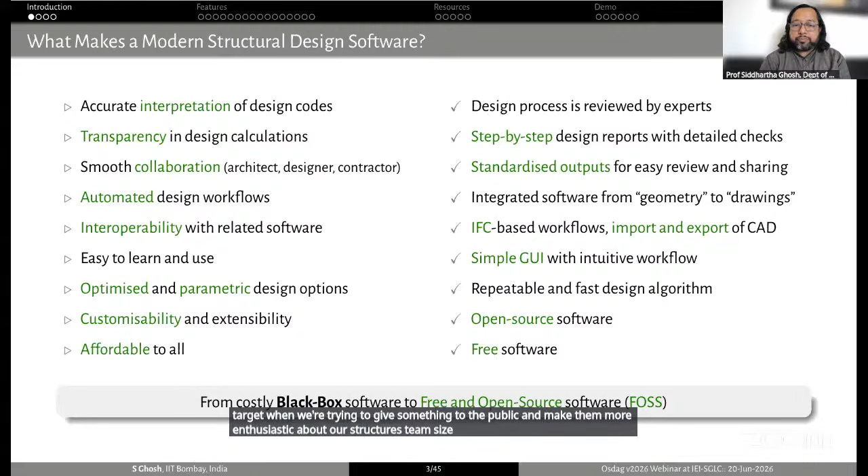Currently what we have are black box software, because you don't know what's happening inside. To develop faith and trust in this software, you need to keep using it, do cross checks, for years to develop that faith. Still, sometimes you may say, I don't really know how this mass is calculated, I don't really know how torsion rigidity is calculated. That's where free and open source, FOSS software, comes in and says, I can tell you exactly what it does, and you can make sure for yourself that it does it the way you want. So absolute transparency is something you can achieve through that.

Now coming to OSDAG, what does OSDAG do? It's a very simple software, that's why sometimes we call it a tool, not even a software. It does design and detailing of steel structures as per IS 800 2007, because that's the most recent code we have. Once it's updated, we'll go for an updated version. Note that it follows IS 800 primarily at its core, and the goal is to aid teaching and learning in a classroom environment for structural steel design, but also for practicing professionals. We wanted to provide an affordable and transparent alternative to typical software you may be familiar with.

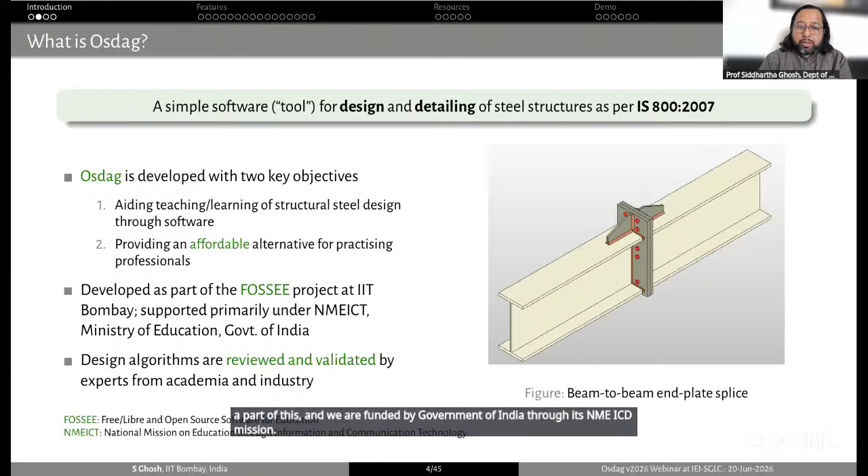Now, what are the motivations? I touched upon this earlier, but let's go through it again. What I find, from personal experience but corroborated by many experts in this domain, is that many structural engineers are not really confident in steel design compared to their expertise with RC design. It's a very big difference. In most places, only a few people know how to do steel design, most others do not. It's an unfortunate situation, but this is one big motivation for creating OSDAG.

Also, there is a lack of standardized and accessible tools for teaching and practice. When we say standardize, we are looking at Indian standard, but also how you practice it. And accessible, so affordability becomes a constraint. Commercial software are costly. For example, software that focuses on connection design and provides customized solutions for steel connection design is really, really costly. What happened in India, if we look back 20, 30 years, there is still a lot of software piracy.

So we used to have pirated software on our computers, which is definitely not an ethical thing to do, right? So we also wanted to move away from that. I mean, with our technological know-how, why should we use pirated software?

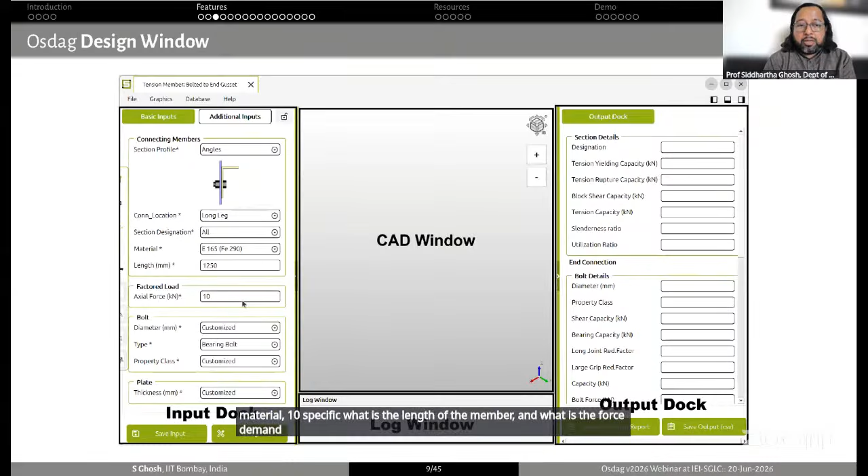These are all drop-downs that one can use. Then you specify material, then you specify what is the length of the member, and what is the force demand. I'll come to each detail later on. You can see the options, different sections you can use to design the tension member, how you connect it, the material, the forces.

Once you go to the bolt and diameter, you don't specify the bolt diameter directly. Either you select all, meaning all bolt diameters typically available in the market, or you can say my supplier gives me only this bolt, so I'll use these diameters. Once you say customize bolt diameters, it gives you an option to select using this pop-up. So here you are selecting 8mm and 10mm bolts.

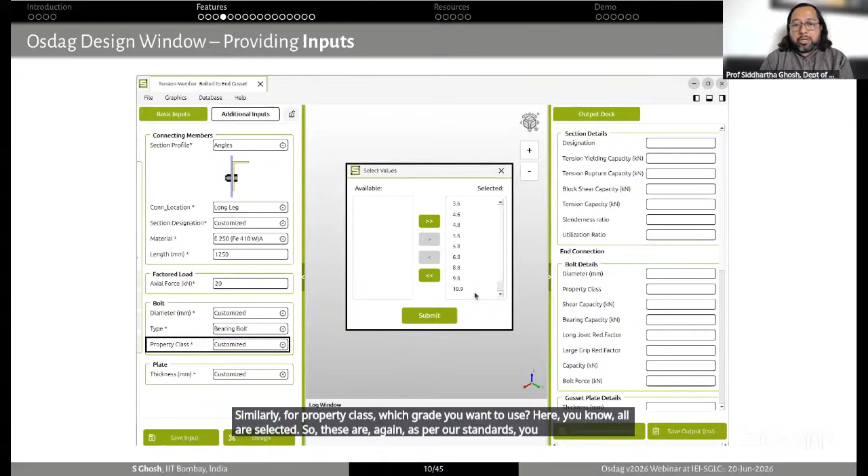Similarly, what kind of bolt behavior you are expecting. You can use bearing bolts, which are the typical black bolts, or you can also use friction grip bolts, HSFG bolts. That selection option is there. Similarly, for property class, which grade you want to use. Here all are selected, as per our standards. You will see the whole standard has been coded into the software.

So you have all of these on the tip of your mouse click. And the plate, which is basically the gusset plate, what kind of thickness you're going to use. Again, you can give individual selections, select them all, or it's up to you. Here you are selecting some discrete values like 14mm, 22 and 28. It will do the design with that.

Once you have fed every information, you can see that there are these asterisk marks. Wherever there is an asterisk, that means it's mandatory information that you have to select. Once you do that, you need to click on this design button, and then it does the design. You can also separately save the input for future use.

There is one more thing that I wanted to show you. So far we are talking about basic inputs, but there is this tab for additional inputs. If you are an experienced designer, you can come to this, but for learning, you don't need to come to this. For an experienced designer, yes, this is very important. Let's look at what it is.

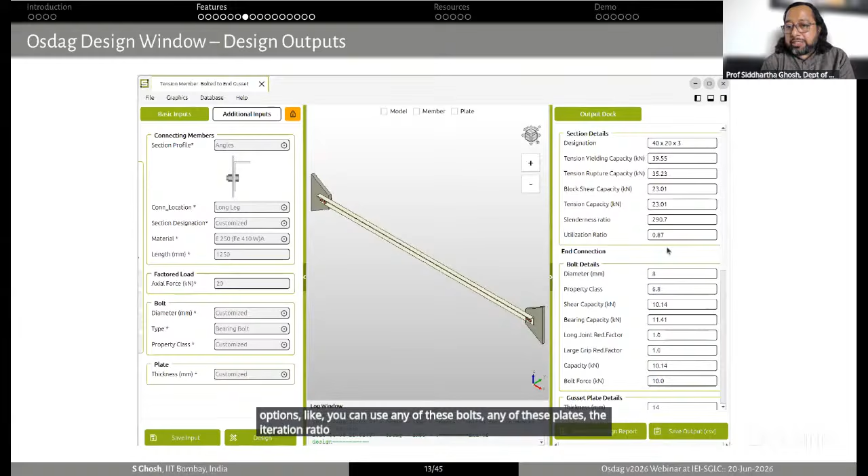Absolutely every information you can find over here. There is a scroll bar, you can scroll down, you can find information on the section, what are the capacities, what are the demand, what is the utilization ratio. Many times you look at that. Since you gave many options, like you can use any of these bolts, any of these plates, the utilization ratio is pretty high. You can achieve good design. Similarly, there is information on the bolt, the gusset plate, and so on.

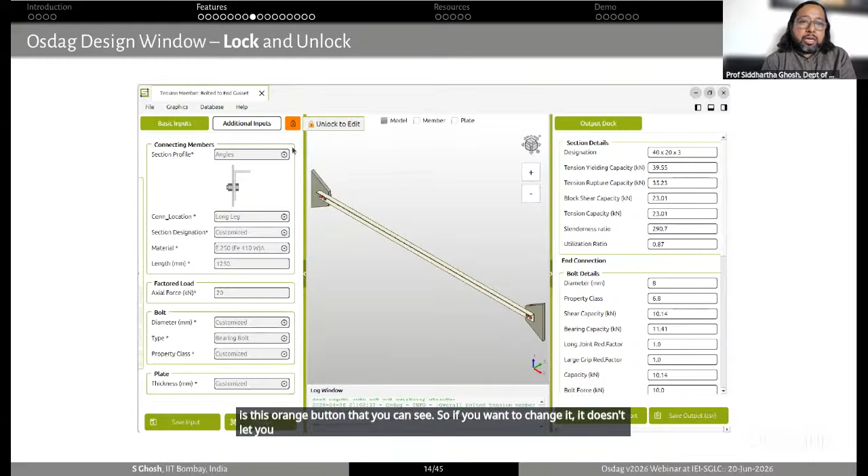Here you can see if you don't like the design and want to change something, there is this orange button. If you want to change it, it doesn't let you unless you intentionally want to unlock. Once you unlock, then you can change the design. Again, you can generate a design report - you can see the button here - and also save output in a spreadsheet readable CSV format.

If you look at the CAD part, as you put your mouse on it, it highlights wherever your mouse is, highlights that component of design and gives you the details. So it says it's a 6.8 grade bolt, diameter is 8 millimeter, and the number of bolts in this connection is 2. Here you can also see the details of spacing between bolts, bolt capacity, all the information.

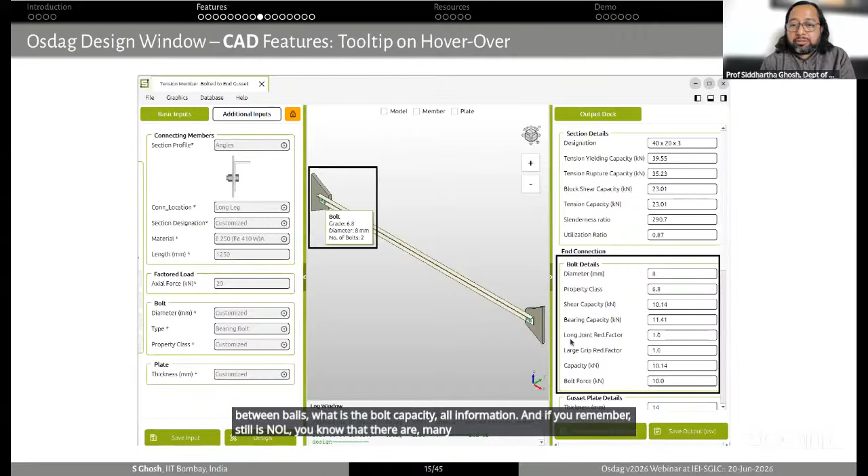If you remember steel design well, you know there are many calculations, including long joint reduction factor, large grip reduction factor, etc. This shows that it can take care of all of those, and it has taken care of everything.

Of course, if you want to see whatever you have designed in greater detail, you can close the input and output dock and fill the whole window with the CAD window. Here the whole model is selected, but you can also select the plate, the member and the connector separately - it will show it that way.

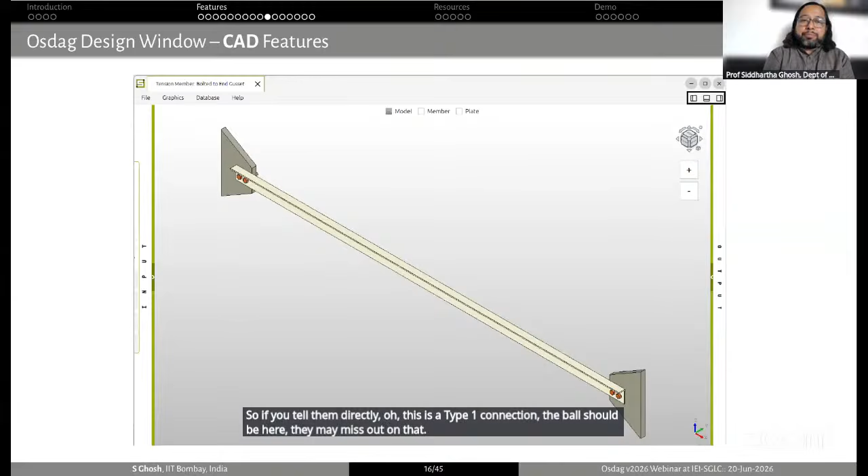Why we put this much effort into the CAD is that many times we see young professionals are not so familiar with being able to visualize the thing they are designing. If you tell them directly, this is a type 1 connection, the bolt should be here, they may miss out on that. But once they design something, they keep seeing these things - what is a type 1 connection, what is a type 2 eccentric connection - these things become very easy for them to understand. That's what we try to achieve with this.

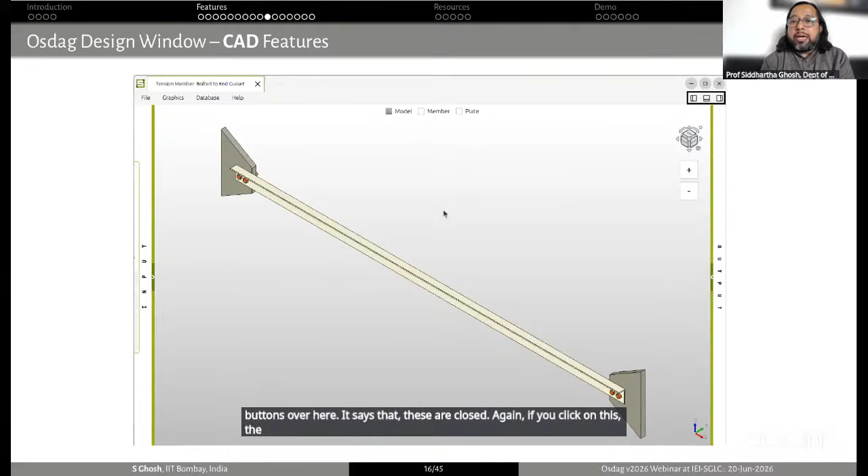So you see that the input dock and output dock have been closed. This can be selected using these buttons over here. It says that these are closed. Again, if you click on the small arrow that you see there, this part will get darker and you can see the whole thing.

There will be a demo, of course, and you can see much better what it does. We'll also see more about the cube, the zoom controls I talked about. And as I said, you can see it separately.

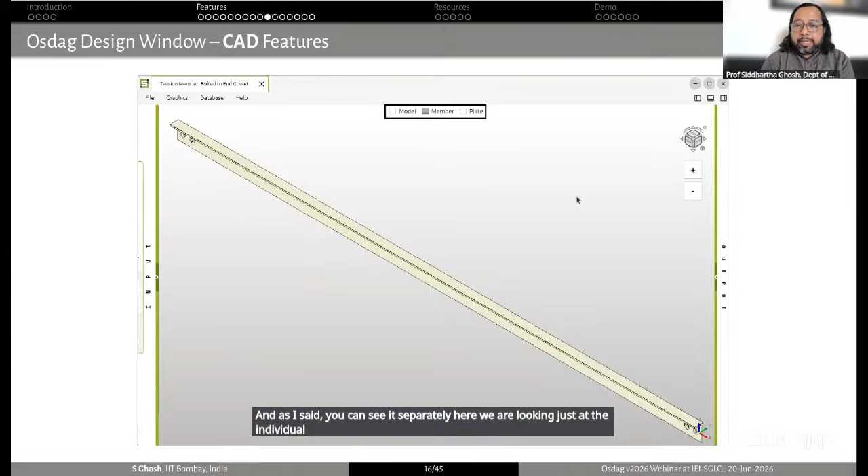Here we are looking just at the individual member, the angle section. This is a scale model. So if you have a cutting machine and want to drill holes for the bolts, you can give it to your fabricator, and they should be able to very accurately put the holes of proper dimension in the perfect location.

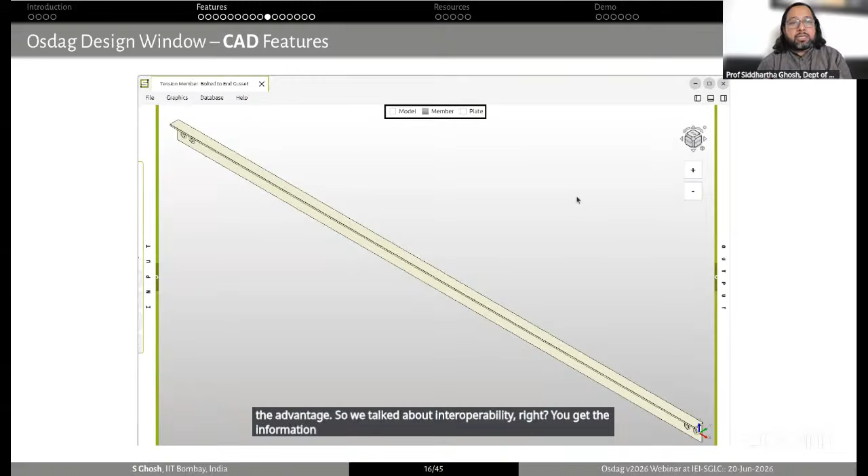That's the advantage - we talked about interoperability, right? You get the information from the structural design and give it to the fabricator, and they can use it. That's what we are trying to do over here.

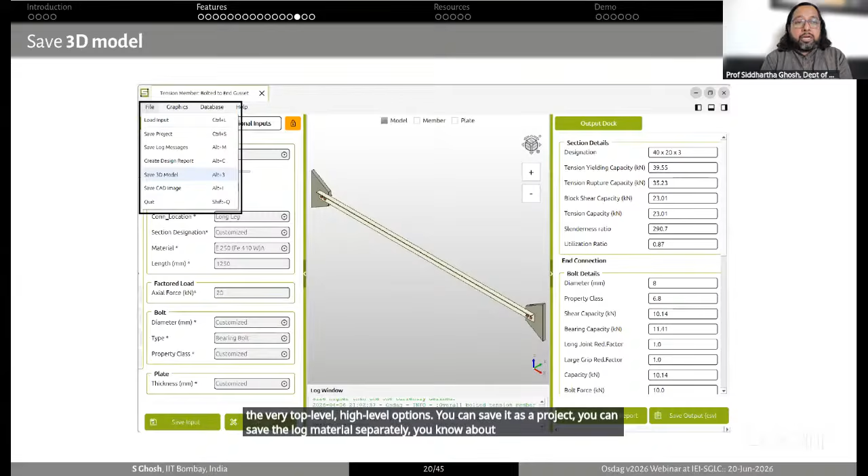There are options to save the project. If you go to file, these are the top level options. You can save it as a project, save the log message separately, or create a design report. But what I want to draw your attention to is how to save the 3D model.

I don't know what you are using. Maybe you are using SolidWorks, maybe you are using FreeCAD, which is another free and open source software. All these CAD apps or CAD software can open these files.

I'd particularly draw your attention to IFC, because IFC, Industry Foundation Classes, is the standard for any BIM, building information modeling software, and it should be the key for interoperability between software, so information can go from one software to another without any hassle at all.

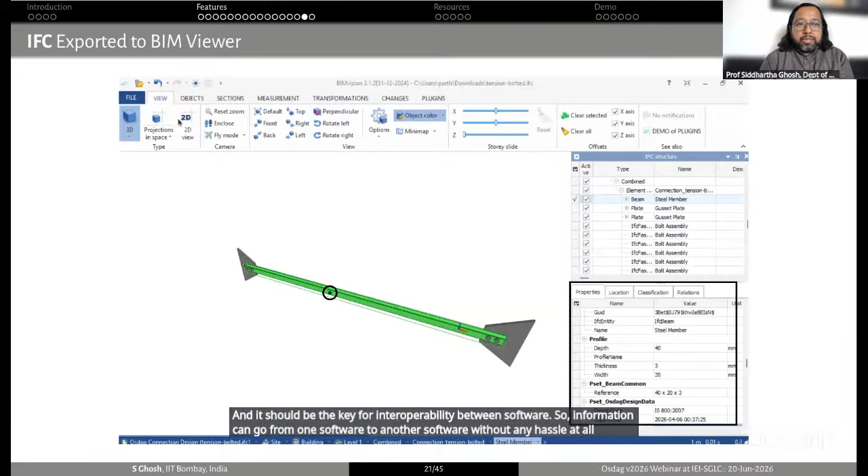Here we are showing you that we got that IFC file, and we are looking at the IFC file using a BIM viewer software. Once you select, you can see the green one is the selected one. It shows to the right side in this box, and it shows all the necessary information for this element.

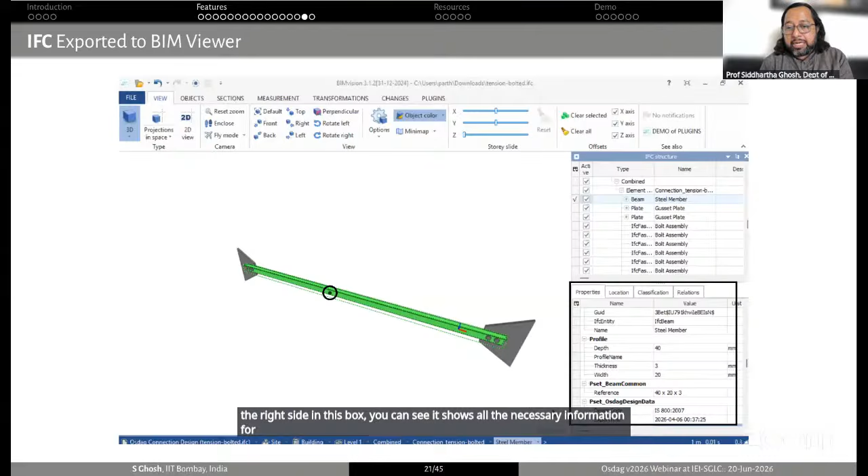It even says what code it is using and all the dimensions. Every information is given there, because that's what IFC does. It shows the metadata very easily, and one can check the design as well.

If you are familiar with this drafting software, from the 3D model you can also create 2D drawings, structural good-for-construction drawings that can also be created. So that's how we ensure it goes very easily from the structural designer to someone who's going to check it using the design report, or someone who's going to fabricate it, and finally it gets constructed.

Fossee is free and open source software, mostly for education purposes. But as you can see, OSDAG can be used both for education and actual engineering practice.

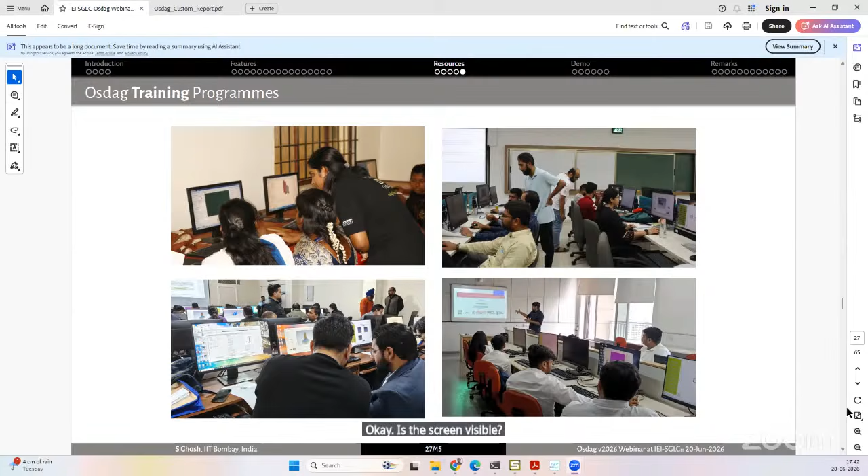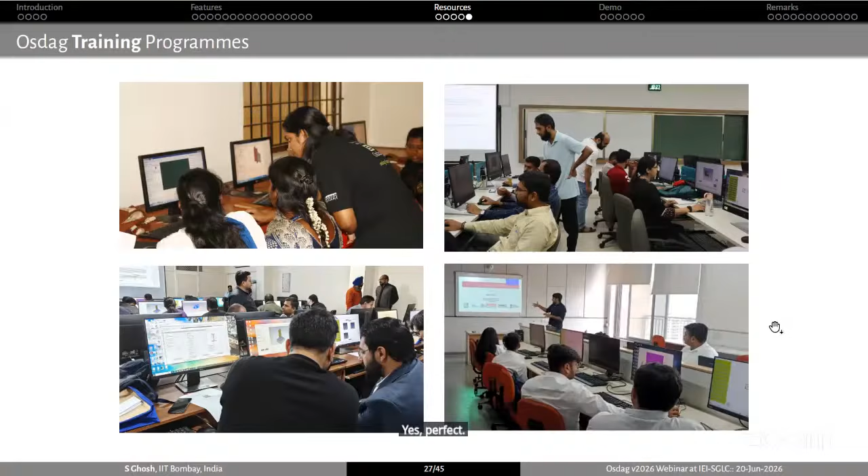Okay, hi, thank you everyone for joining. I'll give a brief demo on OSDAG.

The first demonstration problem is on cleat angle connection. We've tried to frame these demonstration problems like a textbook question, showing how we can integrate OSDAG. The question says: design a cleat angle connection between MB400 and MB250 beams for a factored design shear force of 40 kilonewtons. The bearing bolts available are of sizes 12, 16 and 20mm, and of grades 4.6, 5.6, 8.8 and 10.9. The grade of steel the question asks us to take is Fe410 with Fy 250, and we can assume any data if necessary.

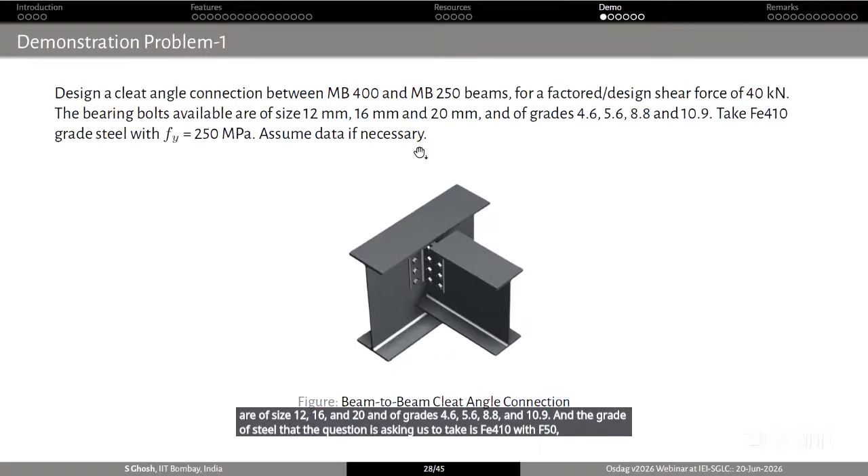Now if I go to OSDAG, this is the OSDAG homepage, and these are the modules that we have. Since the question has asked us to design a cleat angle connection, we'll go to connection, where we have many different types of connections, then to shear connection, and there we'll find the cleat angle connection module.

These are the inputs required for the cleat angle connection module. Now we'll go back to the question to see what the inputs are. The module we've selected is connection, shear connection, cleat angle connection, where the connection is between two beams, MB400 and MB250.

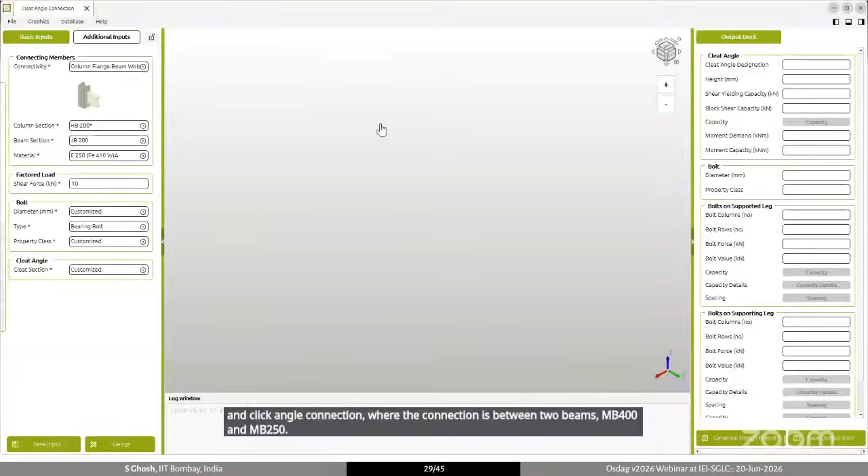Here you have a few options: you can connect column flange and beam web, column web and beam web, or beam to beam connection. Since the question asks for a connection between beam and beam, we'll select beam to beam, and you'll see a representative image of this connection here.

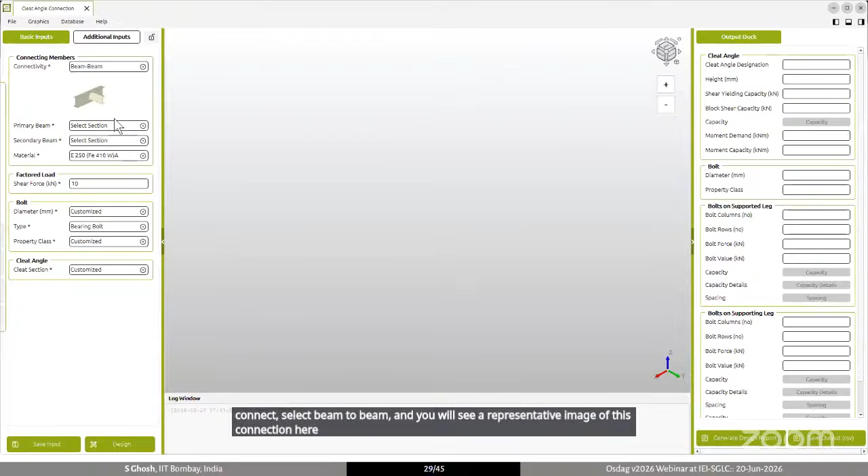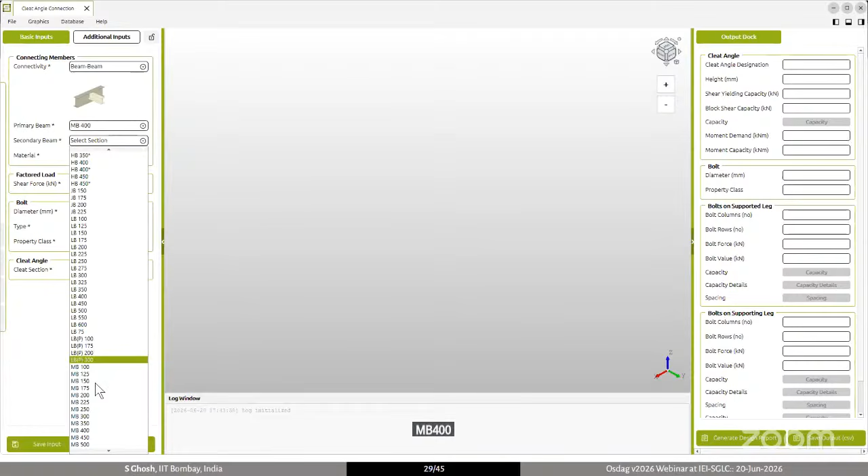The question says the primary beam is MB400, secondary beam is MB250, and the material is E250 Fe410WA. So we select the beam from here: MB400 and MB250. This list of beams covers a lot of beams as per IS 808 and commercially available NPB, UB, UC sections. This is a comprehensive list.

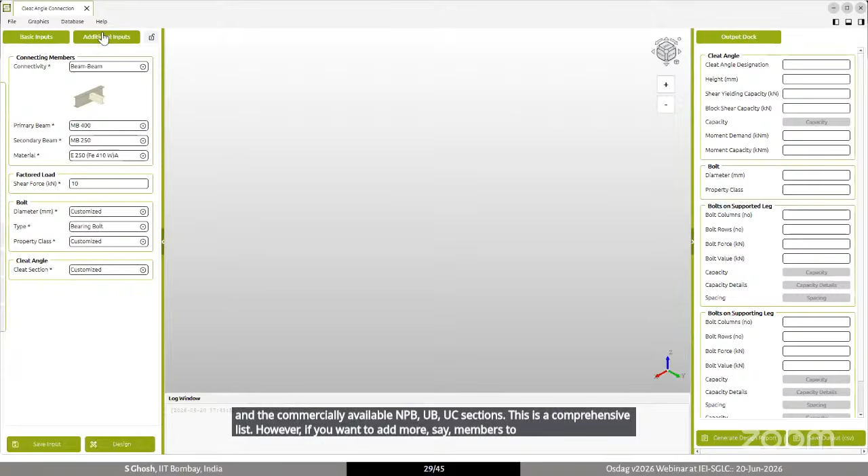However, if you want to add more members to this list, there's always an option in additional inputs where you can download the sample file, put in the values, import the file again, and add your members to the database as well.

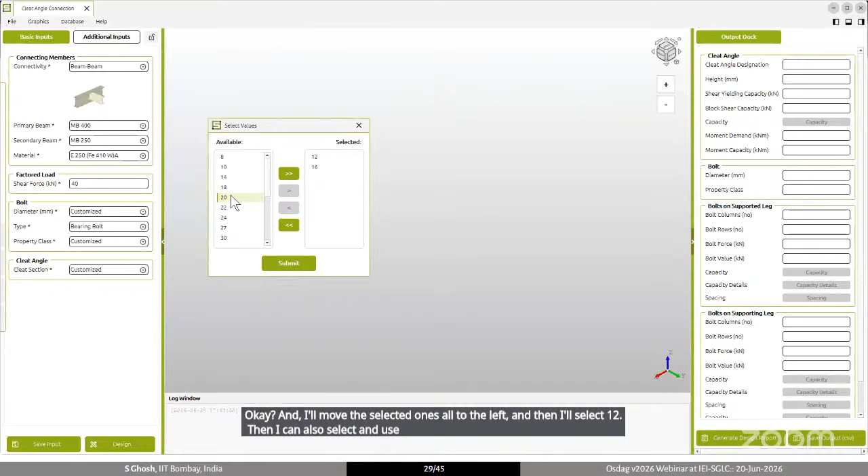Coming back to the question, shear force is 40 kilonewtons, and bolt diameters available are 12, 16, and 20mm. I'll input a shear force of 40 kilonewtons, and for diameter I'll go to customized, move the selected ones all to the left, then select 12, then use the arrow for 16, and double click 20, then press submit.

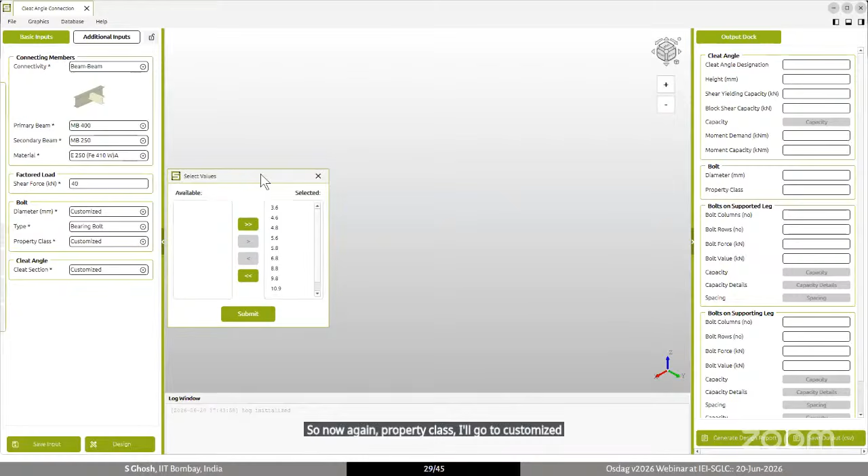The type of bolt is bearing bolts, and the property classes are 4.6, 5.6, 8.8, and 10.9. For property class I'll go to customized, move all of these here - 4.6, 5.6, 8.8, 10.9 - and press submit. We've already selected bearing bolts here, so we don't need to change that.

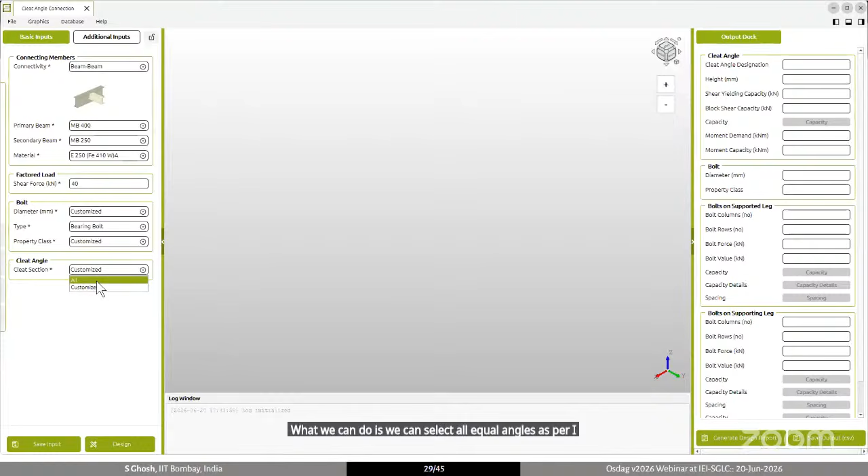Now, which angle are we going to use for this connection, the cleat angle? The question doesn't specify that, so what we can do is select all equal angles as per IS 808. I'll just go for all. So here I've given all of my basic inputs, and now I'll just press design.

Now the design is done, as you can see. Here you see the CAD window, the output dock which got populated with values after the design is complete, and the log window which says end of design.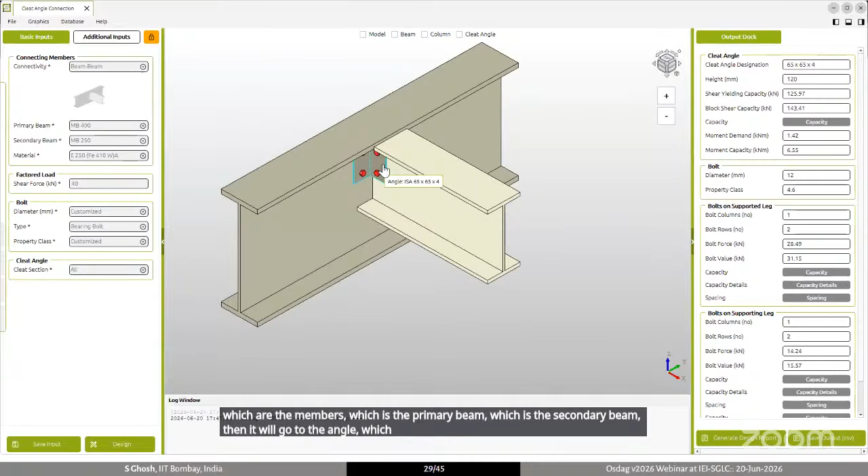Now coming to the CAD window, we can hover over it and it will give us the labels, which are the members, the primary beam, the secondary beam, then the angle selected, and details of the bolts.

Now we can use the scroll wheel to zoom in and zoom out. We can also use these buttons to scroll in and scroll out. We can click and rotate, and we can press the scroll wheel to pan.

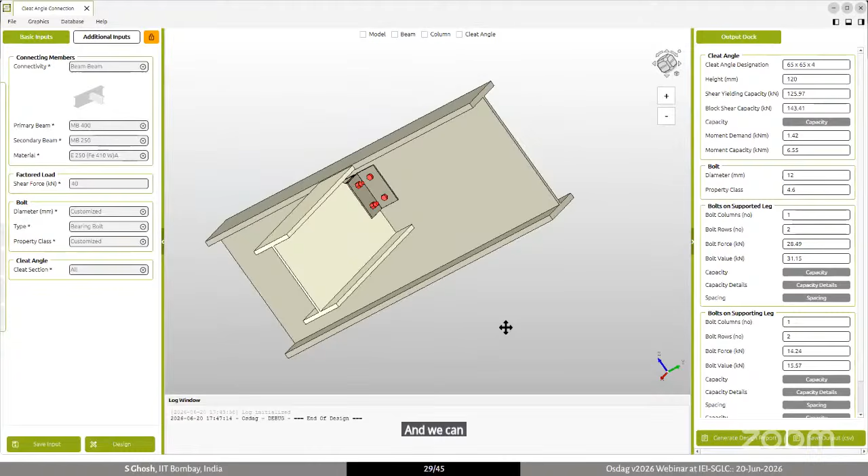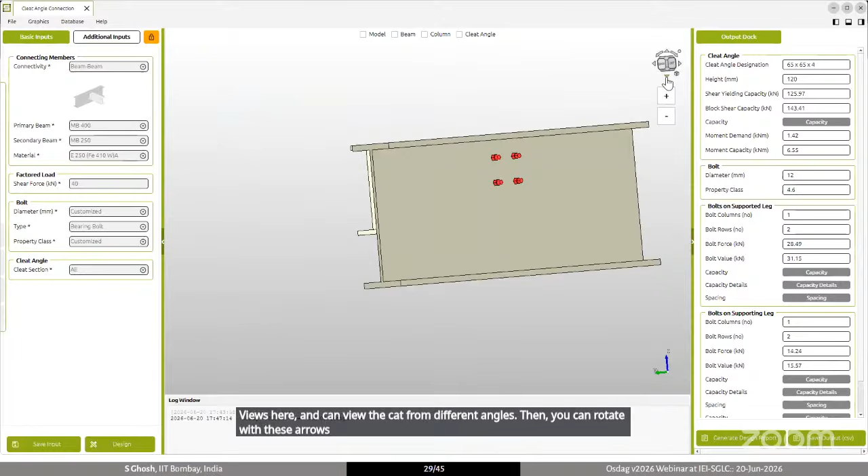Similar functions are available with the cube as well. The user can select different views here and view the CAD from different angles. Then you can rotate with these arrows, and this is how we can rotate as well.

So this is how the entire CAD functionality looks like. And as discussed in the features section, we can separate out different members and examine them and also export them for detailing. Now coming to the output dock.

In the output dock, we can see different outputs, which is the selected designation, and this is the most optimum designation as per the calculation. That's how the algorithm has been set.

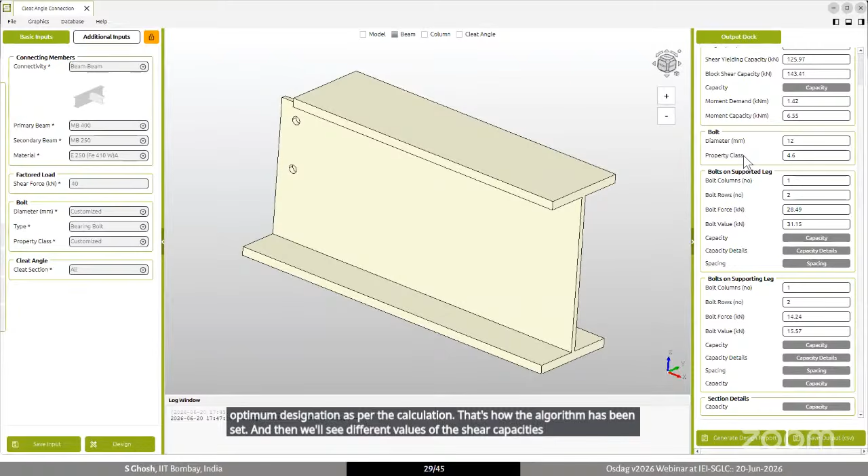And then we'll see different values of the shear capacities, the selected bolt and diameter. Like we gave OSDAG few options like select between 12, 16, and 20, and 4.6, 5.6, 8.8, and 10.8, and 10.9. So based on that, it went for an optimized design where it selected 12mm diameter with 4.6 grade.

Then it will also show spacing details, which is how the bolt has to be placed, and the capacities. It will show the capacities here.

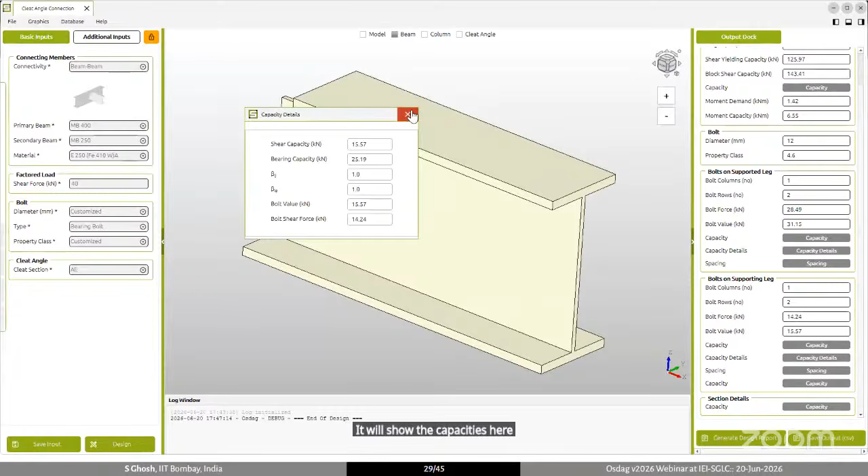And the most interesting part is it will show different failure modes as per the block shear patterns.

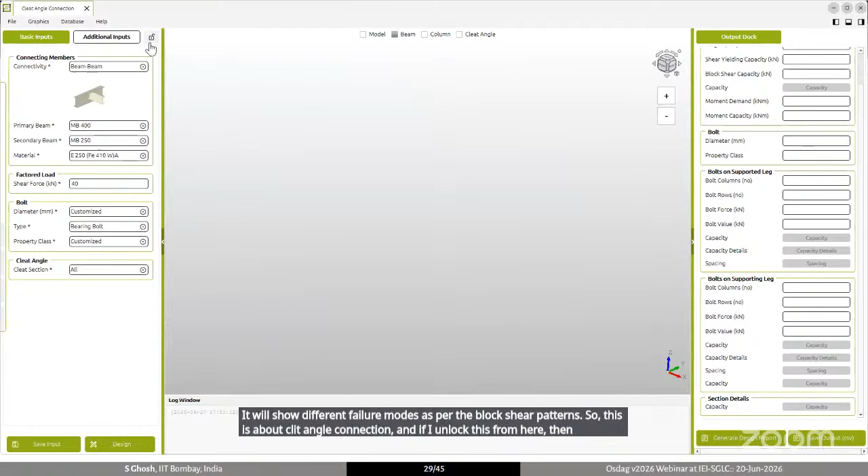So this is about cleat angle connection, and if I unlock this from here, then the outputs go away, the CAD goes away, and you can do a fresh design again.

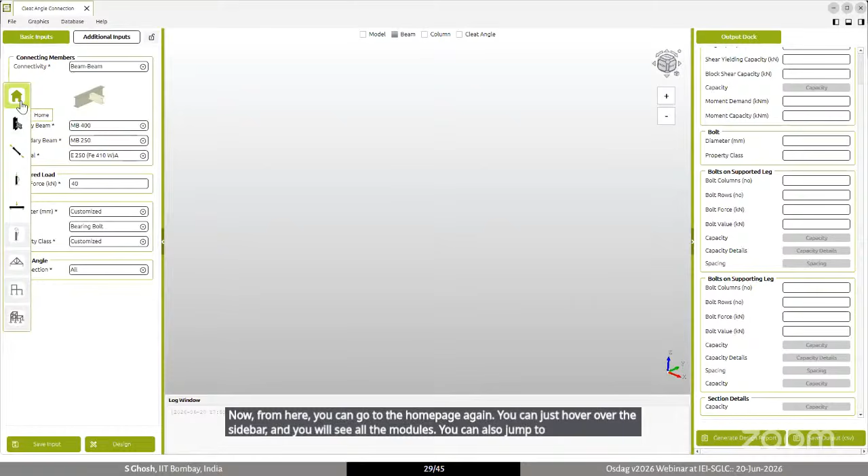Now from here, how you can go to the home page again is you can just hover over the sidebar and you will see all the modules. You can also jump to other modules from here. So we press home and see what's the next question.

Okay, so here the question is: design a bolted splice connection for ISLB 400 beam for a factored shear force of 75 kilonewton and a factored bending moment of 45 kilonewton meters. Design the most optimum connection using friction grip bolt having flange splice plates only on the outside. Take FE490 with FY350. Assume coefficient of friction as 0.48 and other data if necessary.

So now, when we go back to OSDAG, again it's a connection, but now we have a moment connection and it's a beam splice. So we went to connection, moment connection, beam splice, and cover plate bolted.

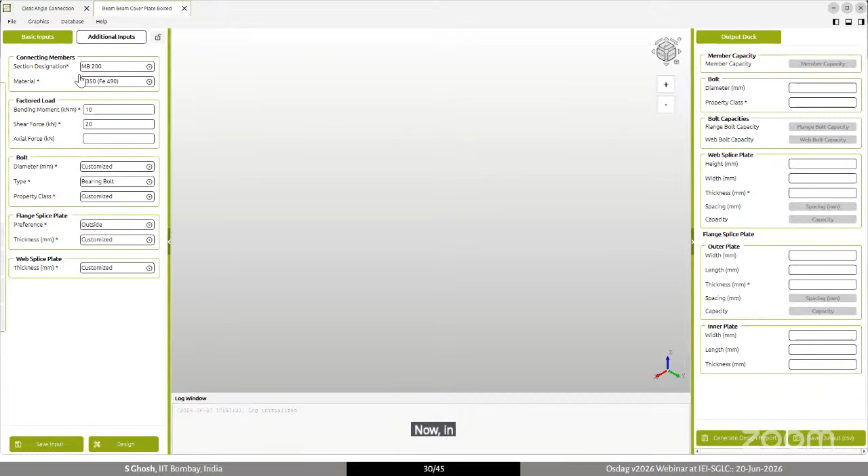Now in cover plate bolted, the question suggests that the designation of the beam is LB400, and the material is E350 FE490. So we go and select LB400 and we have the grade selected as E350 FE490.

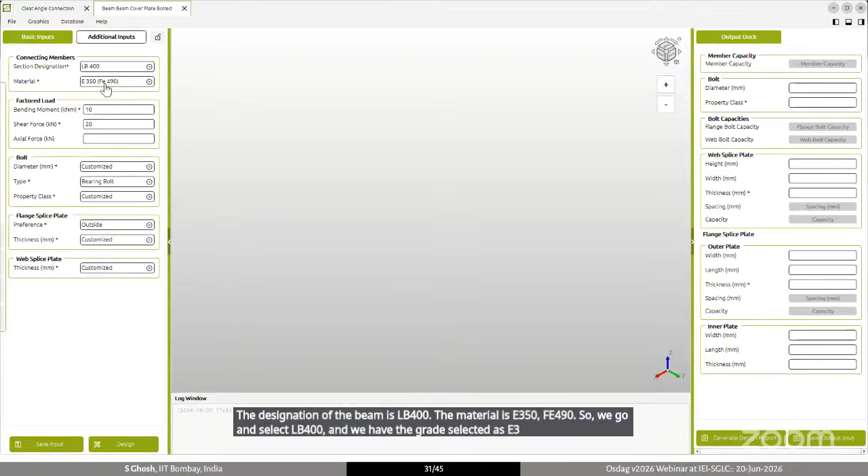Now the load demands are 75 kilonewton of shear force and 45 kilonewton meter of bending moment.

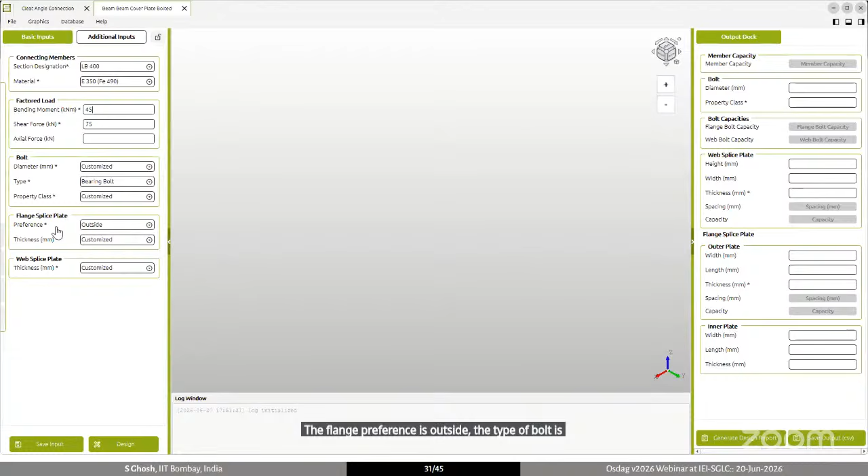The flange splice preference is outside. The type of bolt is friction grip bolt. We also have an option where the flange splices can be provided on the inside and outside both. But now we are going for a friction grip bolt.

And the question says design a bolted splice plate connection, so it doesn't give any details related to bolt diameter or bolt grade, so here we will select all. It also doesn't give any detail related to the available thicknesses for flange splice plate and web splice plate, so here too we'll go for all.

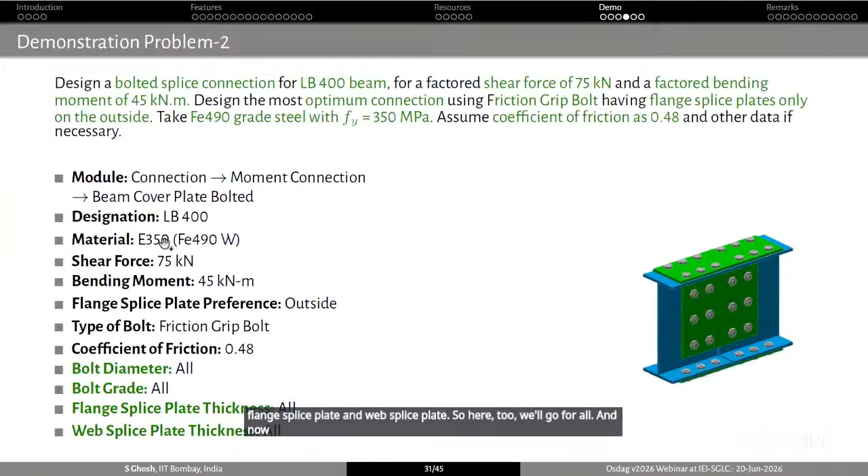And now the question says that 0.48 is the coefficient of friction we have to use, so we can go to additional inputs and slip factor. We come here, define it, and press save. And now we can press design.

Within a few seconds, this design is completed, and you can see the CAD window and the output dock.

So now I'll move to other features like Save 3D Model. So we go to File and select Save 3D Model.

And we'll have options where we can save it as .brep, .iges, .stp, .stl, and .ifc.

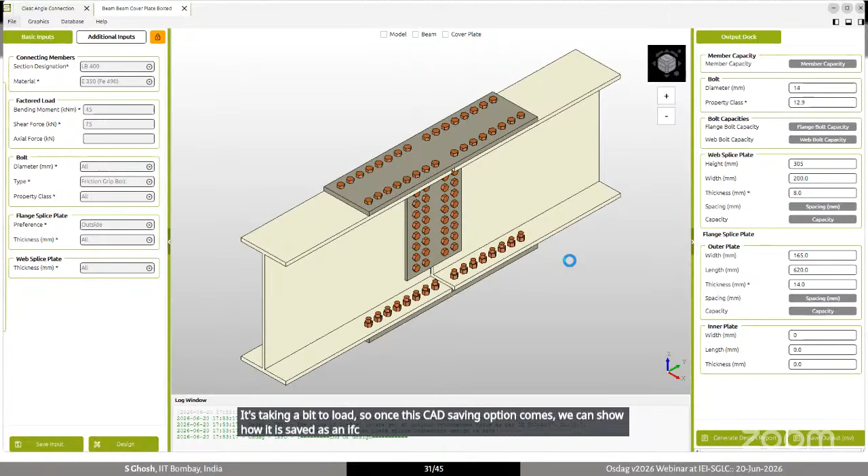Once this CAD saving option comes, we can show how it is saved as an IFC, and any IFC file can be opened in a BIM software such as Revit.

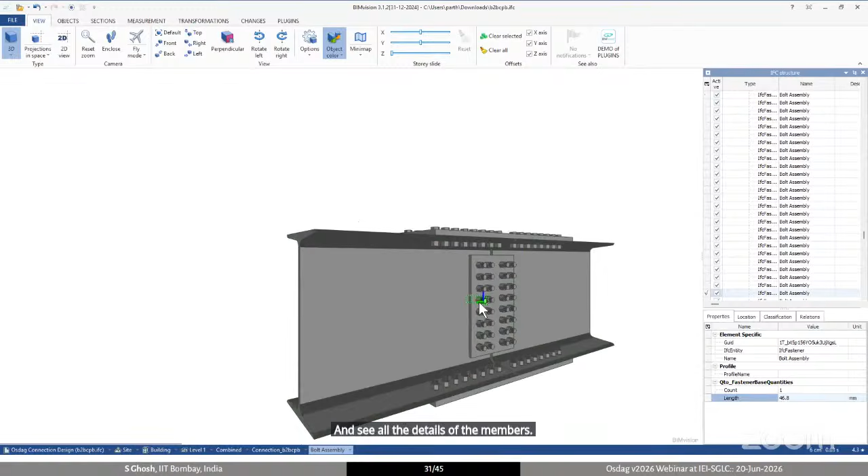Currently, we are using BIM Vision. You can see that this drawing has been exported to BIM Vision, where we can select and see all the details of the members. We can select the bolts, the nuts, and we will get all the details.

So this can be effectively used in BIM workflows to calculate quantities, to calculate bill of quantities, and to do for estimation, etc.

Once save 3D model is pressed, we have these 5 options: IGS, STP, STL, BREP, and IFC. We have seen how we can save it as IFC and then view it. Typical file format for AutoCAD and related softwares is IGS, which you can use with AutoCAD and Revit.

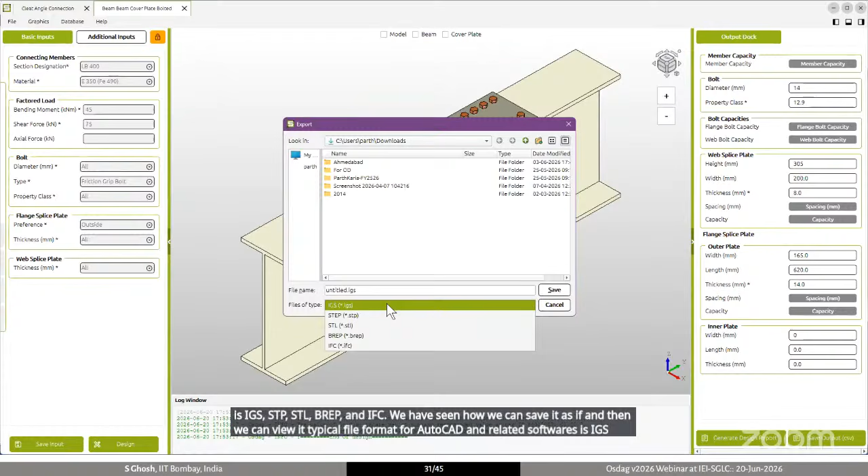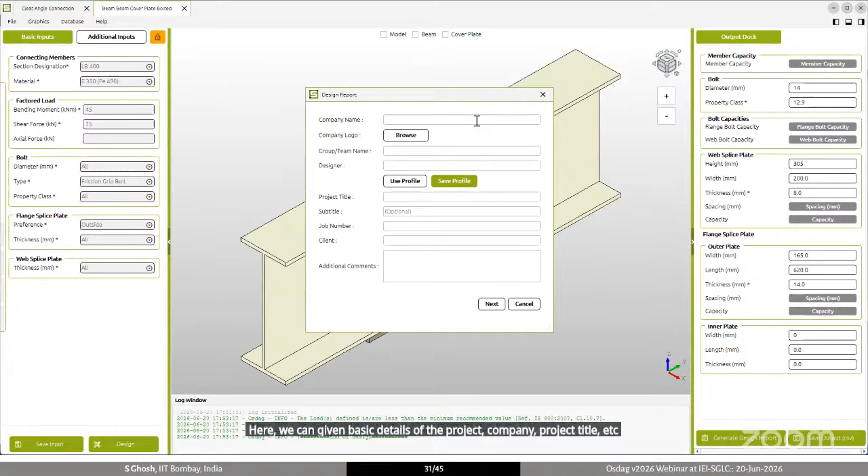Now we can go and generate design report. Here we can give in basic details of the project, company, project title, etc. This is not a compulsory input, but it is required for many professionals submitting their designs. Then we press next.

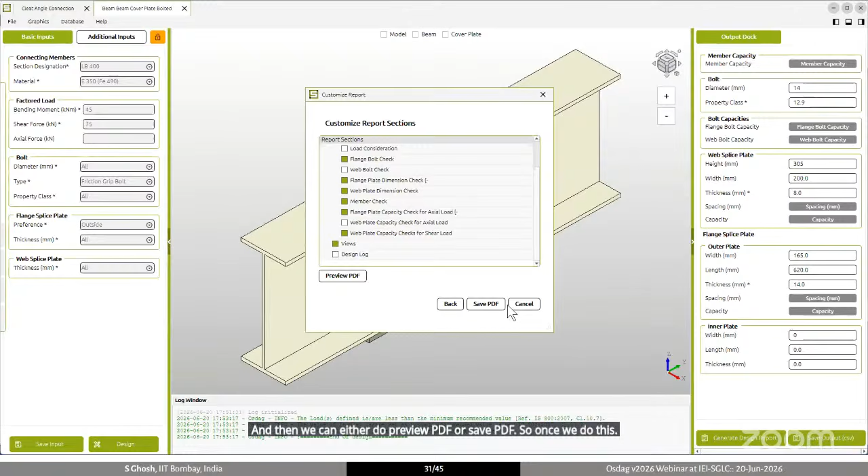Now here we can select the sections that we want to print, and then we can either do preview PDF or save PDF. So once we do this, any design report would look something like this.

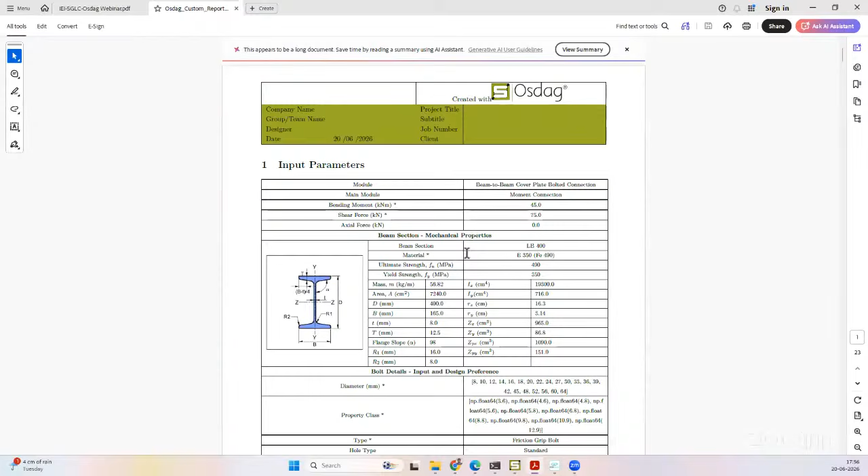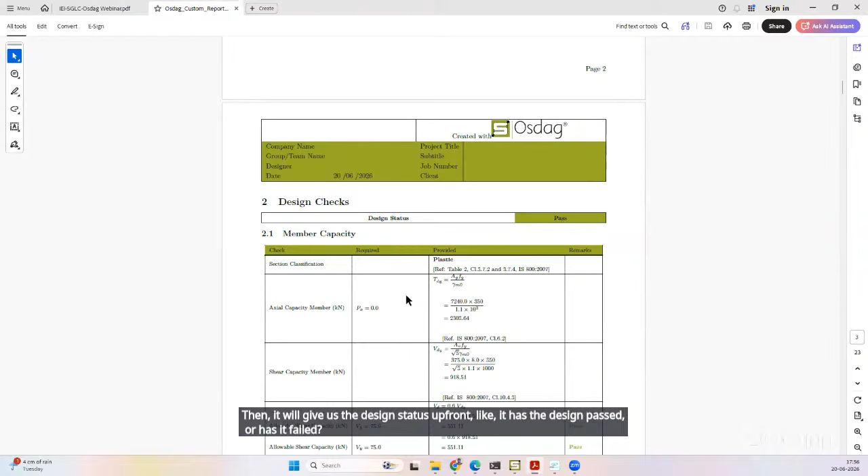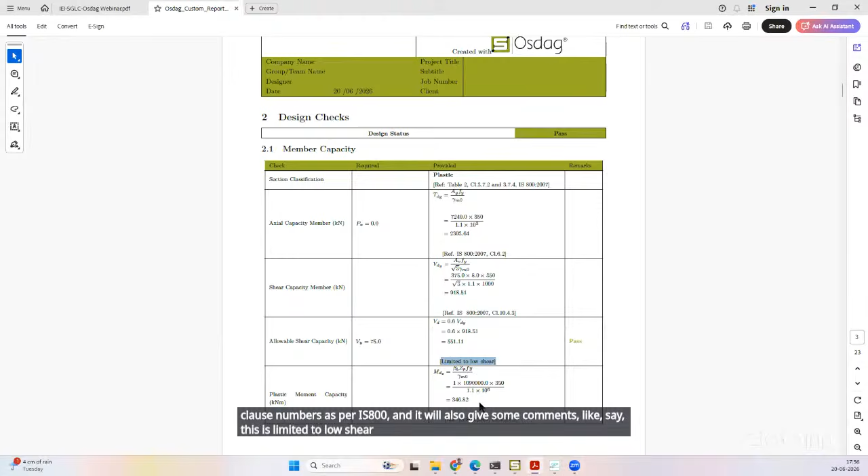This design report starts with the input parameters, all the inputs that we have given. Then it will give us the design status upfront, like has the design passed or has it failed. Then it will go into all detailed calculations with the clause numbers as per IS 800, and it will also give some comments like say this is limited to low shear, etc. So this is the design report where also different interaction ratios are being calculated.

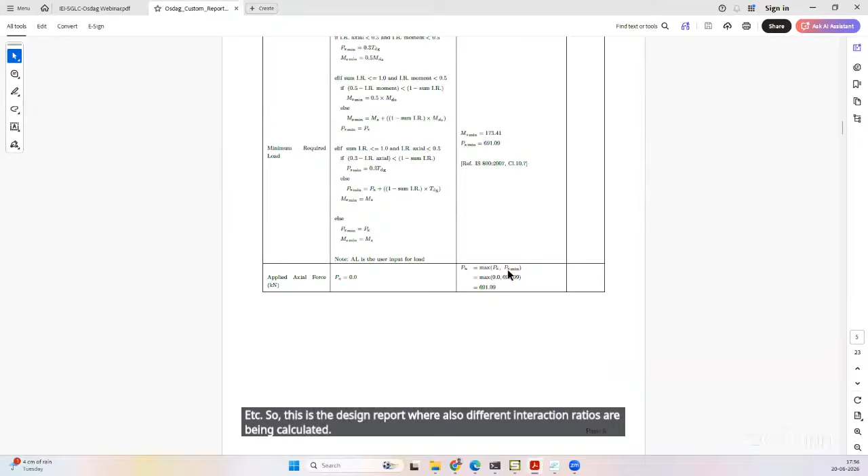And the design report ends with the views of the CAD saved as 2D. So this is the entire design report.

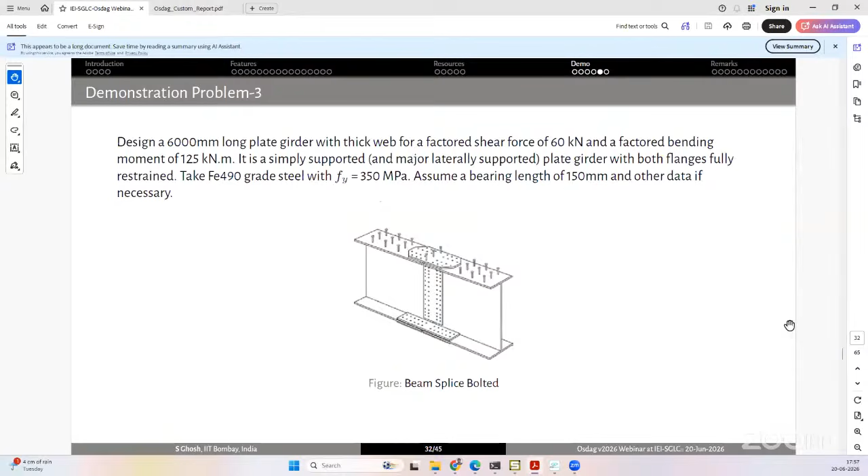Now I'll move to the next question.

This question is to design a 6000 long plate girder with thick web for factored shear force of 60 kilonewton and a factored bending moment of 125 kilonewton meter. It is a simply supported plate girder with both flanges fully restrained. Take Fe 490 grade steel with Fy 350. Assume a bearing length of 150 and other data if necessary.

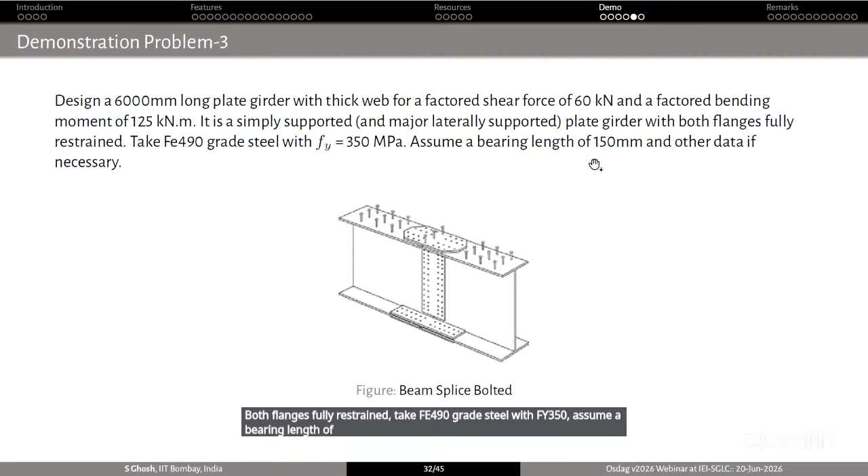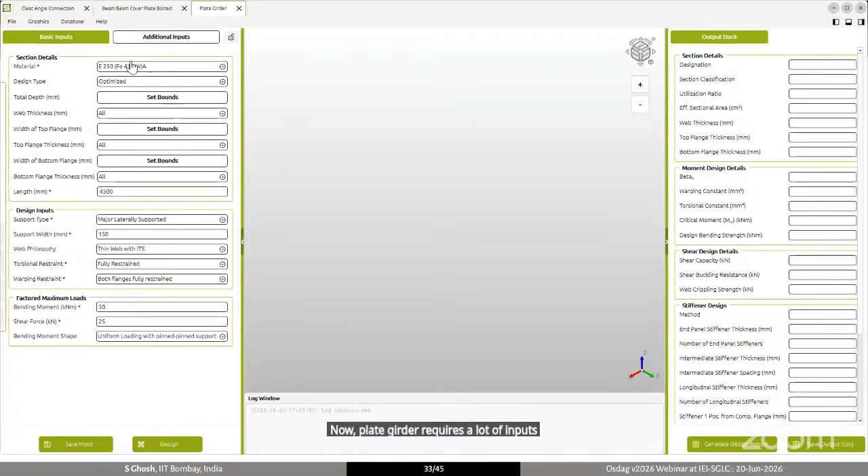Okay, so now we'll go to the module flexural members, plate girder. From here we can go to flexural members directly, and here we can open plate girder. Now, plate girder requires a lot of inputs, like what is the size, width, etc., based on the load requirement.

Plate girder is one module where we have integrated an example of how research and practice can come together, where we have integrated an advanced optimization technique, where based on the load inputs, it will optimize the girder dimensions and give you the most optimum design. This is done using particle swarm optimization, and we'll try and give you a brief demo of that.

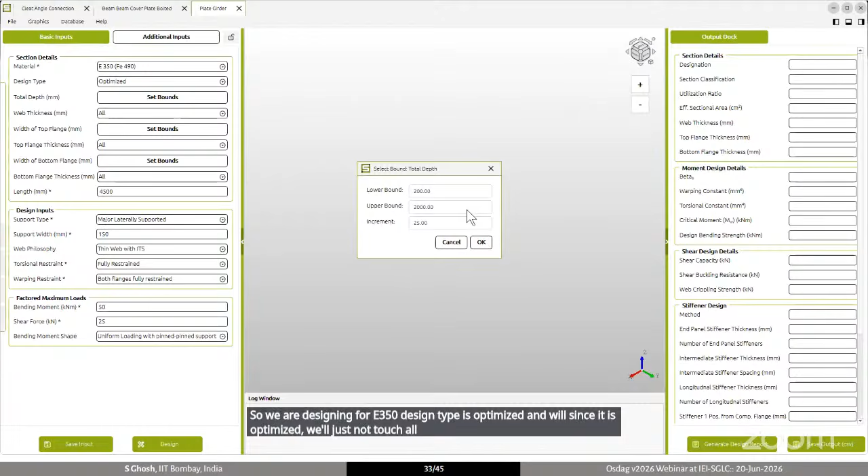So we are designing for E350. Design type is optimized, and since it is optimized, we'll just not touch all of these, but we can also set bounds like the depth can be between 200 and 2000 with an increment of 25 each. So we can define these bounds, but we'll go with default bounds at the moment.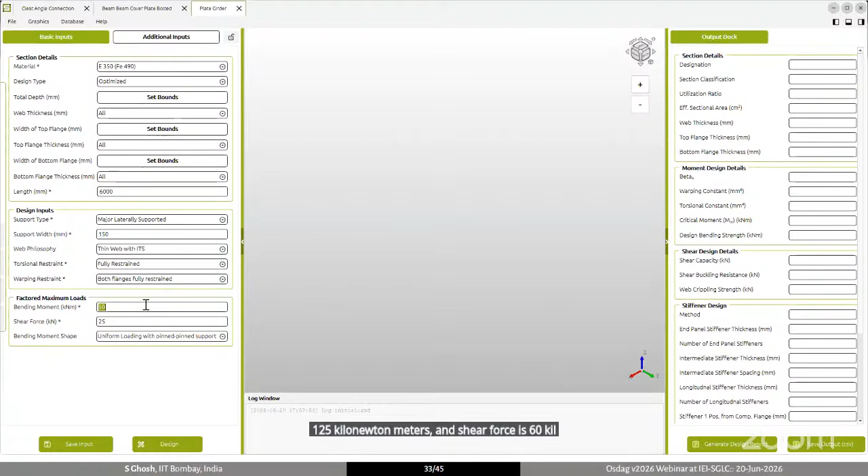The shear force is 60 kilonewtons, the bending moment is 125 kilonewton meters, and the length is 6000. So bending moment is 125 kilonewton meters, and shear force is 60 kilonewton.

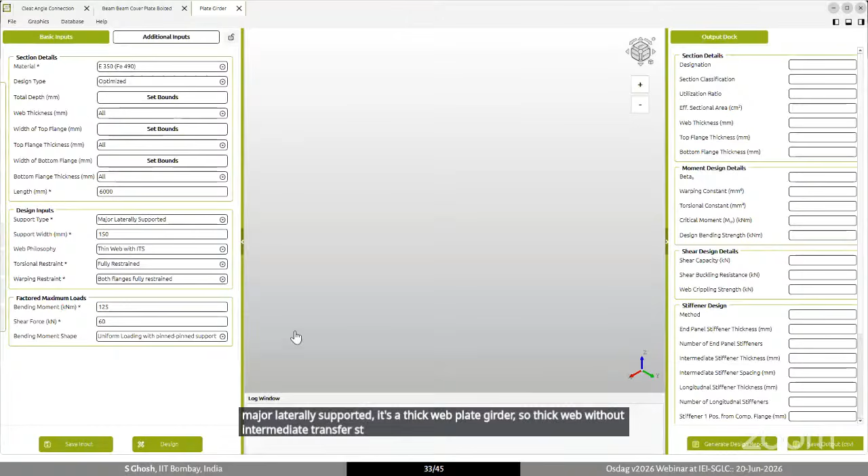What are the other inputs which are necessary: bearing length is 150, major laterally supported. It's a thick web plate girder, so thick web without intermediate transverse stiffeners. So we'll go and select major laterally supported, bearing length of 150, thick web without ITS. Then warping restraint, both flanges are fully restrained.

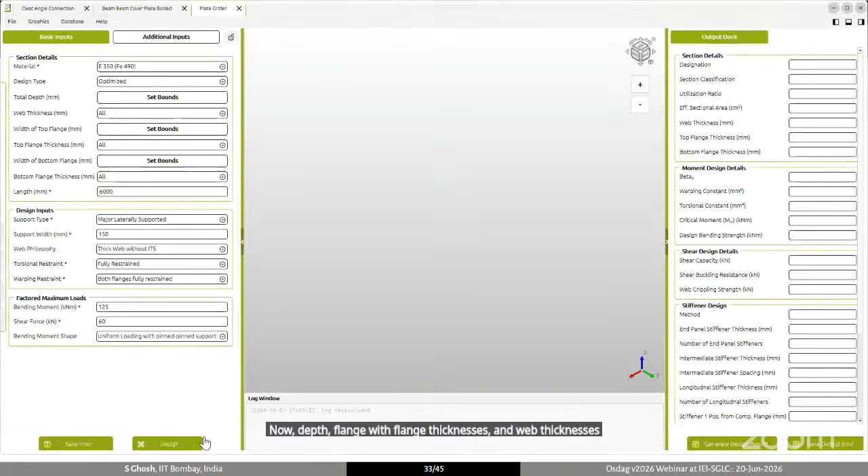Now depth, flange width, flange thicknesses, and web thicknesses - as mentioned, we are going for an optimized design. So we'll let the software, let OSDAG, optimize this and give you the design. So we'll just press design.

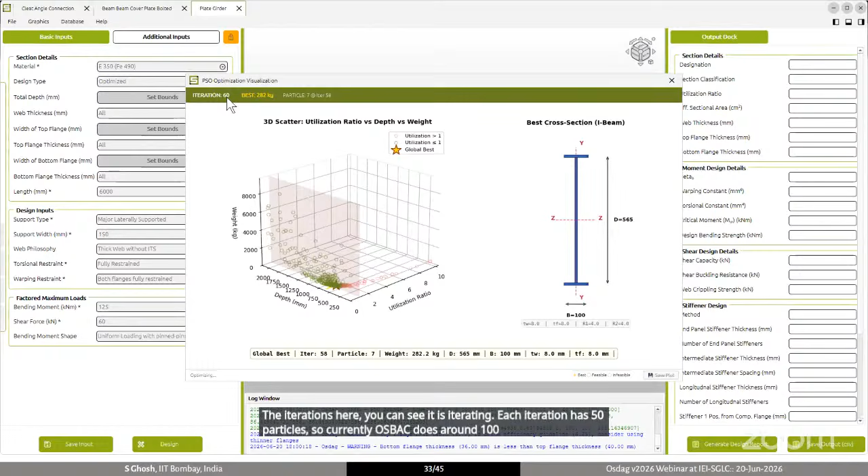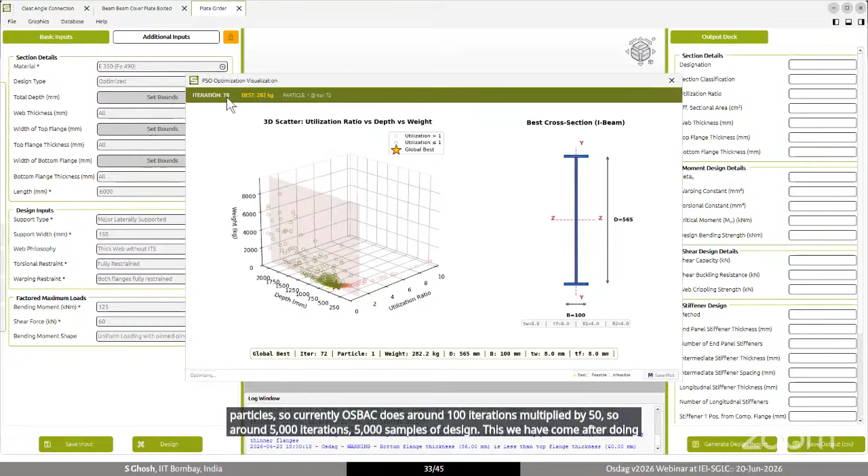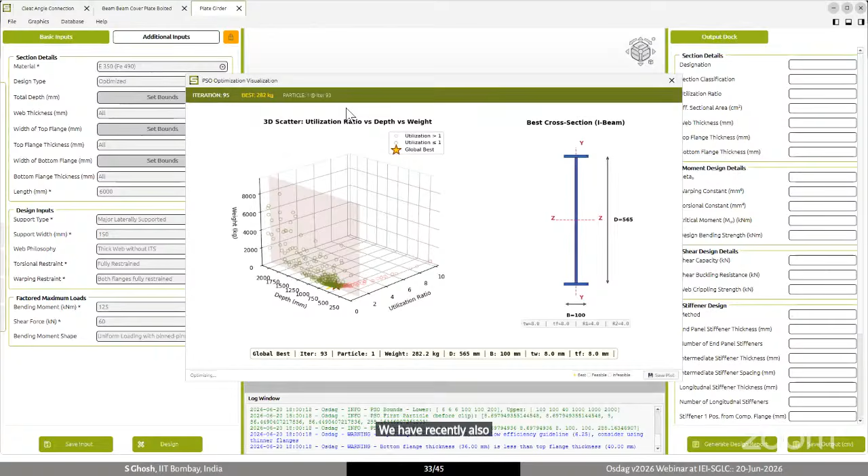You can see the iterations happening here. Each iteration has 50 particles, and currently OSDAG does around 100 iterations multiplied by 50, so around 5,000 samples of design. We arrived at this after doing some back and forth on how to optimize and get reliable results, and we've recently included this in OSDAG Bridge, which we'll discuss.

Once the iterations are done, we get the most optimum design. Since it's a simply supported plate girder, you can see the supports. Since it's a thick web, there are no intermediate transverse stiffeners, but there are longitudinal stiffeners at the end, bearing stiffeners. That's it for the demo part.

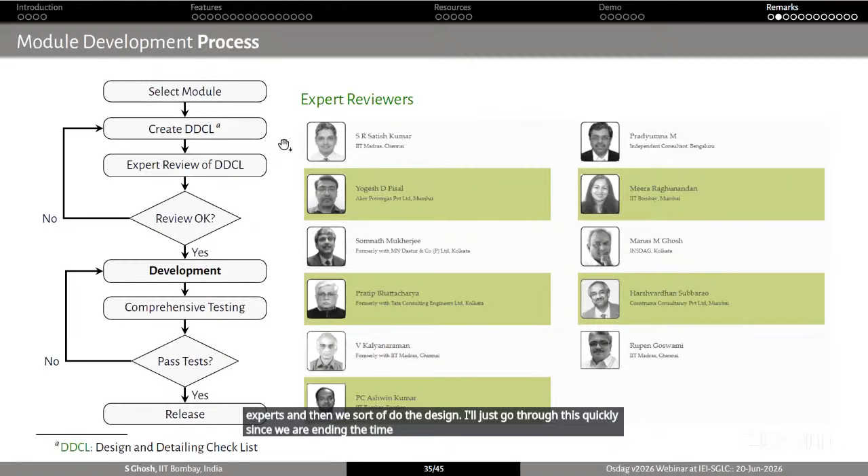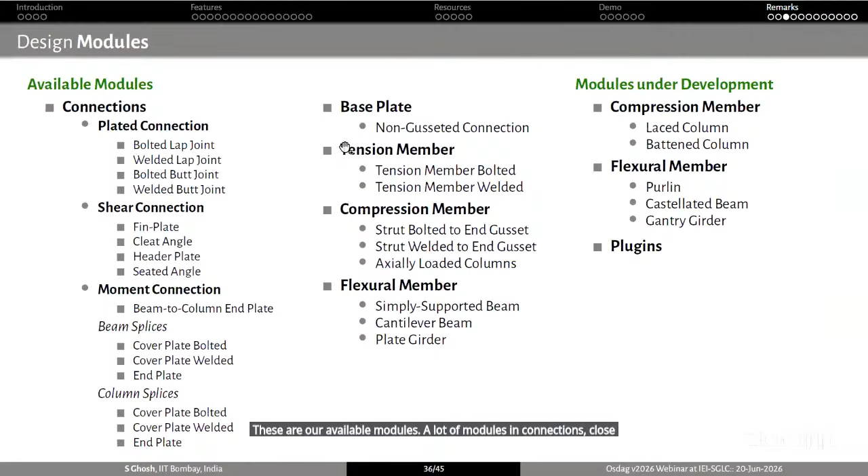This is our module development process, and these are our available modules. There are a lot of modules in connections, close to 15, and other modules like base plates, tension members, compression members, and flexural members. Compression members and flexural members are currently under development.

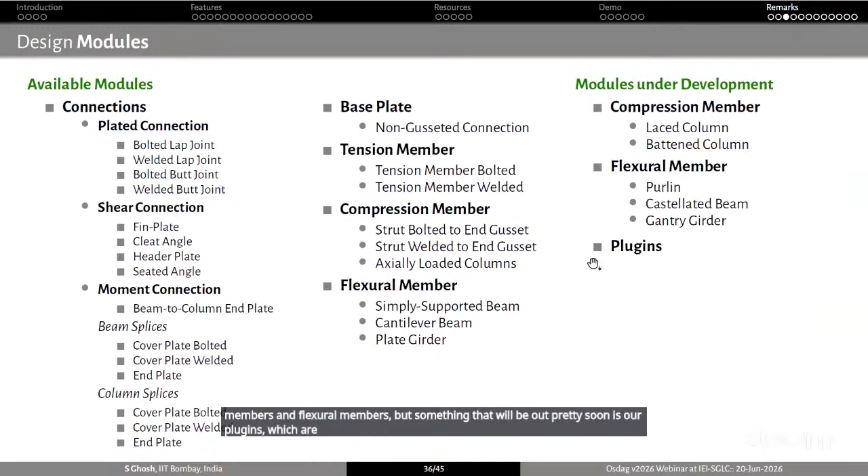Something that will be out pretty soon is our plugin, OSDAG Bridge. What we are working on next is OSDAG on web. Currently you have to install OSDAG and run it, but eventually you will be able to run it through the web without installing anything.

The interesting part is that it will have a responsive UI, so you will be able to use it on your phones, tablets, anywhere, and design it on site, share reports, share drawings, etc.

We are working on a comprehensive plugin framework where we develop our own plugins, but we also want other contributors to develop plugins and share them with us so we can integrate them as official OSDAG plugins. This will also be out in the next release.

You will also be able to export this design as an IFC file, as an IGS file, like all the capabilities of OSDAG.

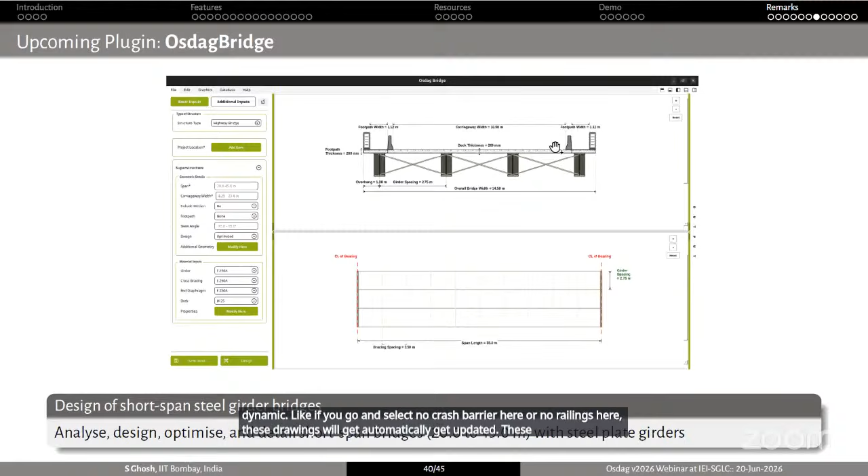This will also be a very effective teaching tool, because once you experience it, you'll see all these drawings are very dynamic. If you select no crash barrier or no railings, these drawings will automatically get updated, and they include the relevant IRC standards.

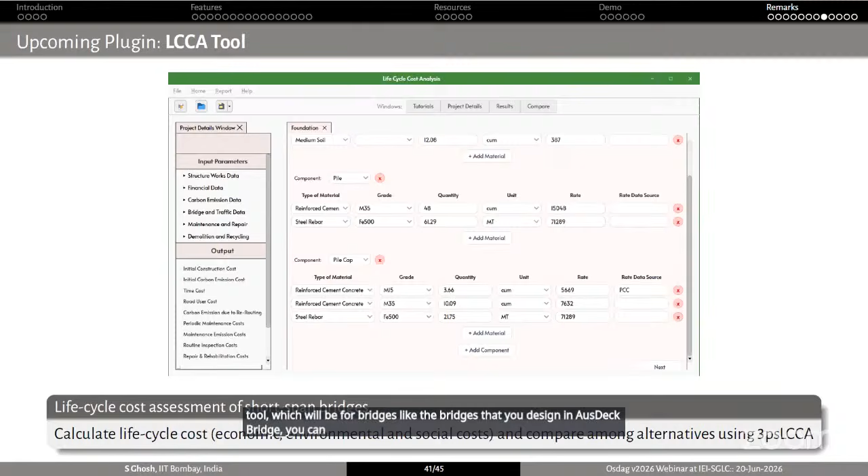Another tool we are working on, which will also be available as a plugin soon, is the life cycle cost assessment tool for bridges. For the bridges you design in OSDAG Bridge, you can do a full life cycle cost assessment with this software or plugin.

What's next for OSDAG, since we have introduced analysis capabilities for bridge design, is to bring this into OSDAG for truss and truss connections and other beam-column modules.

We also intend to work on textbook companions for standard steel design textbooks, where every question can be solved on OSDAG, made available to everyone to help in teaching. We are also working on developing user manuals and developer manuals, plus doing more engagement through online and offline programs.